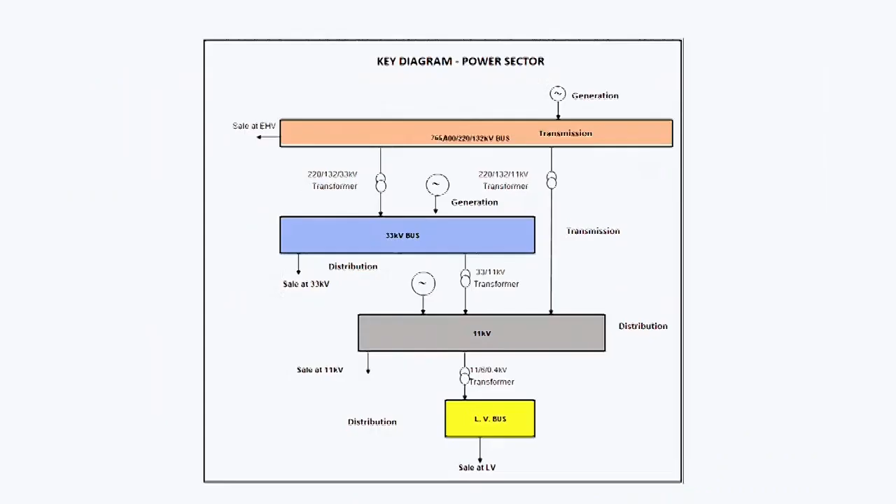Now we shall start discussing energy demand forecasting through applications of AI, artificial intelligence. So for the benefit of students, let us see how the power system is. On top there are generations, mostly large generating stations, then connected with extra high voltage transmission lines. Then it goes to the distribution system. In most cases, distribution companies or licensees receive power at lower voltage, 33 kV, 33,000 volts and below. However, in a few cases, they also receive power at extra high voltage, 132 kV or 220 kV, etc.

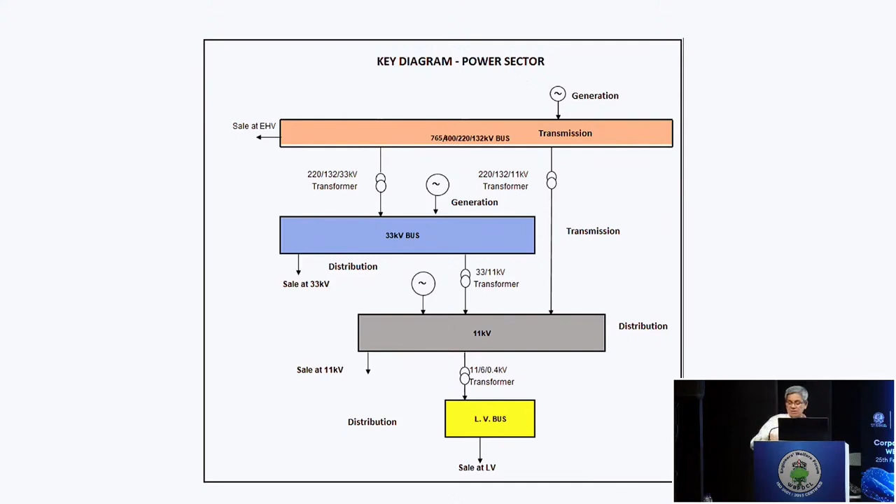Now this demand forecasting is essential for development of the transmission and distribution sector as well as generation. I already mentioned in the morning, it is more important to the generation system since of the average cost of supply to a consumer, 2/3 plus goes to generation. Now, the distribution sector is the most challenging sector because the generating company sells power to one or few distribution companies. Transmission receives power from a few generators and supplies to one or more distribution companies. But the challenge is on distribution because they supply to millions.

Now, some of the challenges, from the right side, are managing demand and generation. Electricity demand and generation has to be balanced. Now, because of climate change, more and more RE sources are coming. As of now, on a pan-India basis, the total renewable generation capacity is 100 gigawatt plus out of 400 gigawatt. Giga means 1000 megawatt. With more and more RE sources, challenges are more because on the demand side, we do not have any control. We means a distribution company, because it depends on consumers. The demand is balanced by controlling the generation.

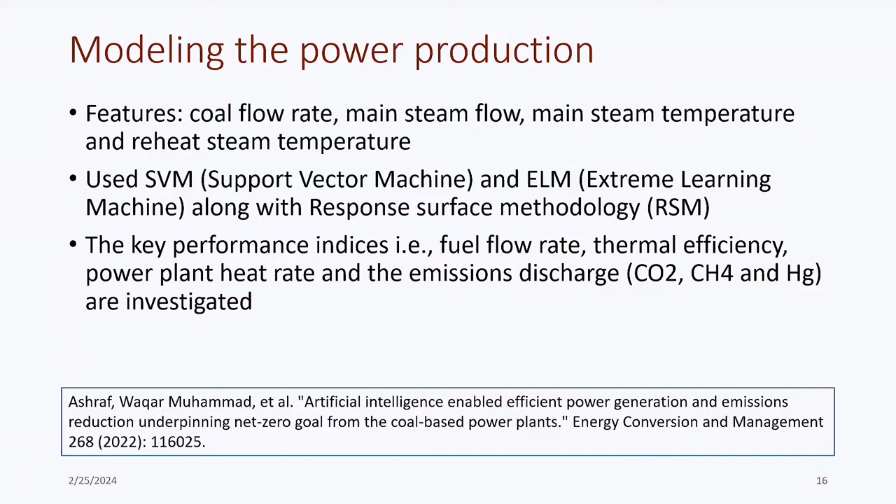So this is a demonstration. They had a particular task, which is efficient power generation with some net zero goal. And they also look at not only the production but also the reduction of these emissions, etc. And they're able to demonstrate that by using this machine learning model, they're able to get better efficiency.

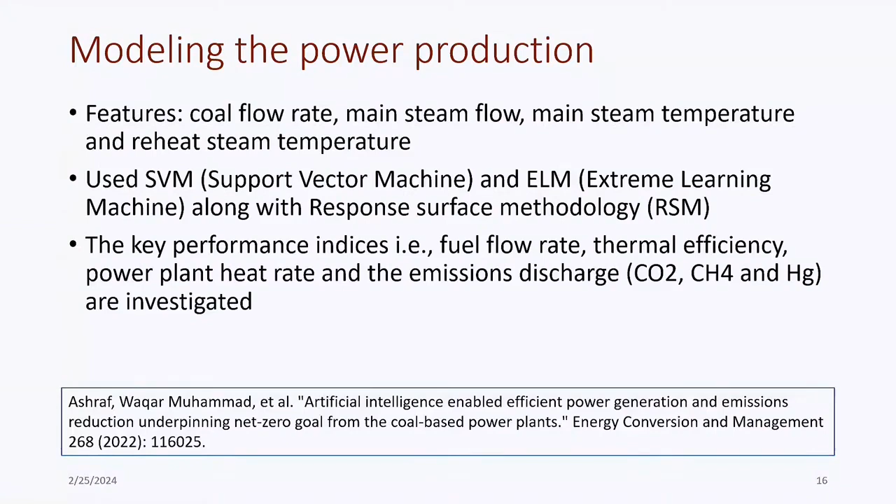There are other examples of supervised learning. For example, there are a lot of tasks in manufacturing plants, and I'm sure in power plants, where object recognition is used. So suppose, again, I do not know much about the plant, but there are different components. You want to understand whether a component is in the right state or not, or if there are different states of a particular object. So people often use computer vision as a classification task to detect the state of an object or detect the presence of objects. So these are all supervised classification tasks.

Then let's look at an example of unsupervised learning or clustering. So what is clustering? Clustering is one form of unsupervised learning.

It's a form where one takes data which is not labeled and tries to find patterns in the data and find the main groups in the data. So group similar objects. And you can think of one application of clustering for anomaly detection.

Suppose you have a lot of data of the normal operation of a plant. And then you apply clustering to find the different patterns. And you want to understand when there is some problem, right? And the main problem with understanding this is that the failure cases are very limited.

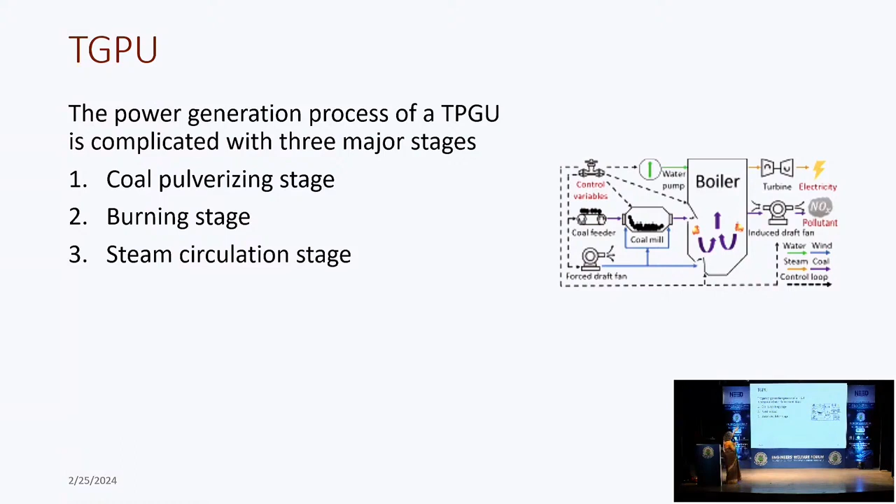So I have limited understanding of the different components of the power plant, but if you permit, I'll talk a little bit about the portion that I understood. So what they say is that the TPGU, because you people are experts, I'm not, but in this paper they say that their TPGU has these three major stages: the coal pulverizing stage, the burning stage, and the steam circulation stage.

And in order to build the model, both for the simulator and for building the controls, they have considered all these different stages and what are the different control parameters and the requirements of each stage. And they have identified what are the important constraints and what are the important controlling parameters. For example, for the coal pulverizing stage, they say that the amount of coal should meet the demand load. Then the valves of the cold and hot air blowers have to be adjusted to ensure suitable primary air temperature.

These are some constraints. For the burning stage, they say that the valves at each of the injection locations, the 20 to 48 locations, need to be controlled precisely. And then there are safety and regulatory issues that need to be guaranteed, so that the pollutant norms and negative internal pressure have to be maintained. For the steam circulation stage, they said that the steam generated needs to satisfy multiple temperature and pressure requirements, which are controlled by the valves, etc.

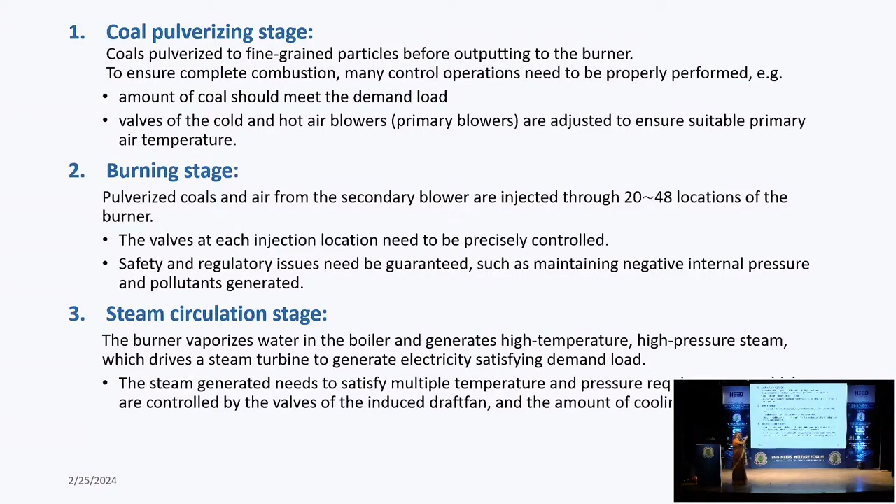So whatever it is, in a typical plant, there are a lot of different components, and they have their behavior and what needs to be done. This is only part of what is reported in the paper. There are several other things. So there are many such control parameters. So what they have said is that in their work, they look at about 70 to 100 major continuous control variables and the chemical properties of the coal, that is the input materials.

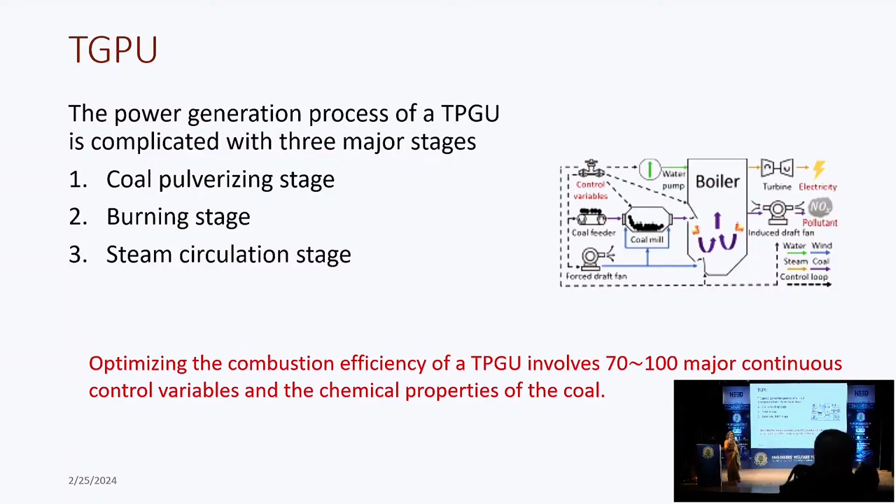Now, I'll take a digression. I'll talk about the very basics of reinforcement learning. In reinforcement learning, in the basic form, we assume that the underlying model of the system is a Markov decision process, where at a particular point there is a state. And when you take an action, the system changes state in a manner which is stochastic, but which is Markovian. That is, the next state is not necessarily fixed, not deterministic. It may be stochastic, but it only depends on the current state and the action.

And you receive a reward. For example, if there's more production, there's more reward. If there are more pollutants produced, then there is a penalty. So reward and penalty are there. Policy is how the system is behaving. When you're controlling the system, what are your control actions? So you are trying to understand, at each state, what is the action that you should take? That is the policy. That is what you want to learn.

And your objective is given by a value function. The value function combines the reward and penalty that you get into a function which you want to optimize. And the policy that you have to decide is the action at every state so that this value function is optimized. So for this, the underlying model is taken to be a Markov decision process, which has states, actions, rewards, transitions, and value function. And there are different ways to construct the value function. One of the most popular types of value function is the discounted sum.

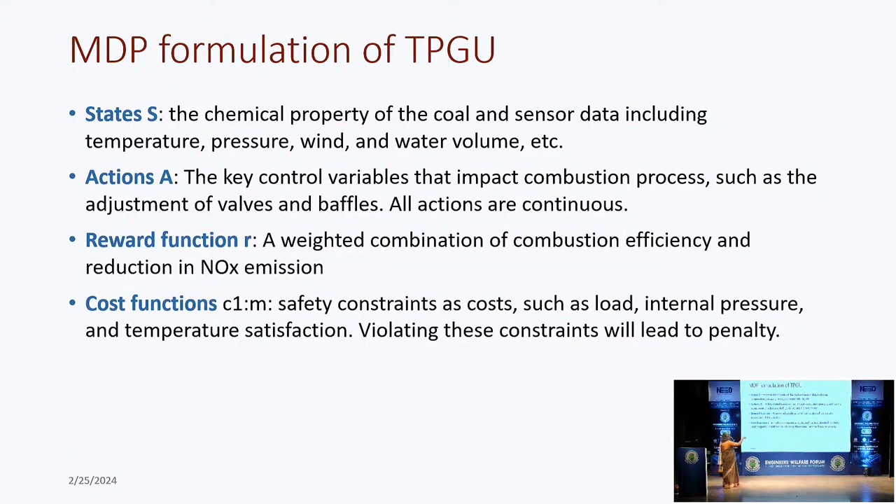Now, for the TPGU that we talked about, the state that they have taken is the chemical property of the coal and sensor data, including temperature, pressure, wind, water volume, etc. The actions are the key control variables that impact the combustion process. They have taken 70 to 100 different control variables. The reward function is a weighted combination of combustion efficiency and reduction in NOx emission. And the cost function has safety constraints, which are the regulatory norms.

Now, based on this, in order to augment the data, they have built a simulator. Even to build this simulator, they have used a data-driven machine learning approach. I'm not going into the details, but they use an approximated dynamic model to generate future states. They do not build one monolithic simulator. Rather, for these three different stages, they have used different machine learning models, using an RNN, LSTM, fully connected network, different types of neural network.

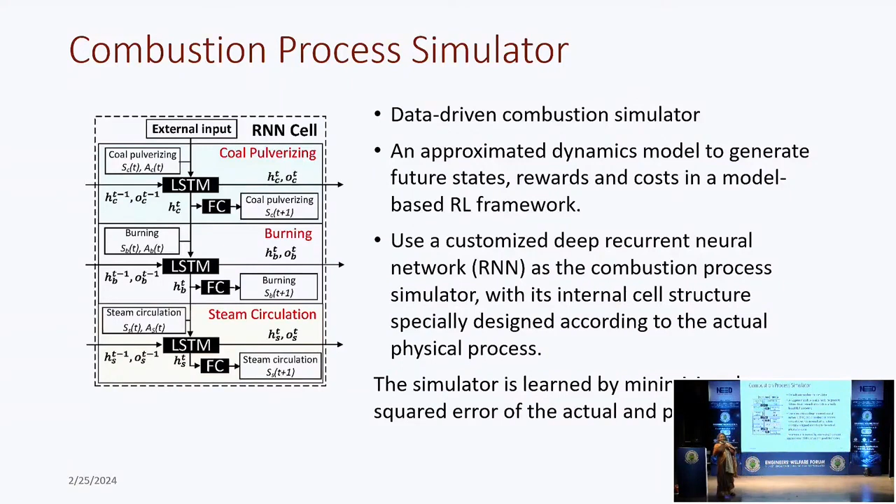They have built the simulator, which is faithful to the data that they already have. But as I said, it is not guaranteed to work well on out of distribution data. That's why this is called an imperfect simulator. And to build a reinforcement learning system, they have a cost critic, because they have to abide by different regulatory norms. So the cost critic enforces the safety constraints.

They also take into account the risk of the simulator, because when the simulator works on out of distribution data, you cannot trust it fully. So they also model the risk. Based on that, they have built a reinforcement learning model which can decide the control actions of all the 70 to 100 control variables. They demonstrate in this paper that they have used this control on 4 different large thermal power plants in China, and in most cases they have got a good amount of improvement.

So this shows that in the power plant, the use of machine learning has been demonstrated; people have used it and found a lot of benefits, and there is a lot of potential for further systems.

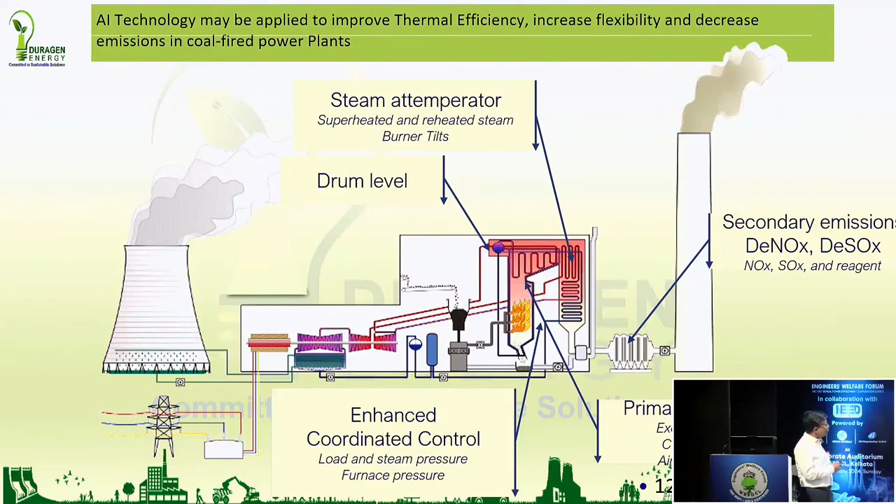Now there is an advanced stage, adaptive AI control. This adaptive AI control will sit on top of any control model, and whatever set point is set from that model, it will be continuously superimposed on that set point. The self-tuning AI platform will increase the ramp rate, startup time, reliability. The thermal stress, that is more important, will be addressed by all these things. And this model can be on premises or on cloud.

So that is one thing I'll come to, whatever disadvantage or doubt is in our mind. At India level, in our power sector in India, we are still not able to avail all the facilities, but on a very piecemeal basis, some of the applications are already there.

So in Indian industries, real-time safety violation detection is there, already running day and night, 24/7. Then automated anomaly detection of assets through drones, mainly at heights. Then ESP monitoring, any defect in ESPs, all these things are monitored through that. Then AI ML based advanced pattern recognition for predictive maintenance.

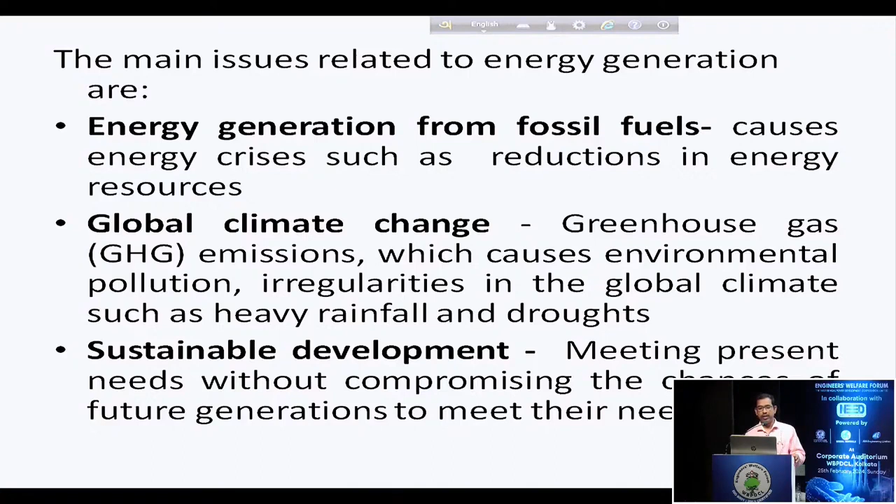So okay, so now you are experts in energy and also power. So you all know that energy generation mostly comes from fossil fuels, and you also know the impact of that kind of power generation on the environment, and you're familiar with the greenhouse gas effect and environmental pollution and how it is affecting the global climate. So now we have to look for sustainable development, meeting the present needs without compromising the chances of future generations to meet their needs.

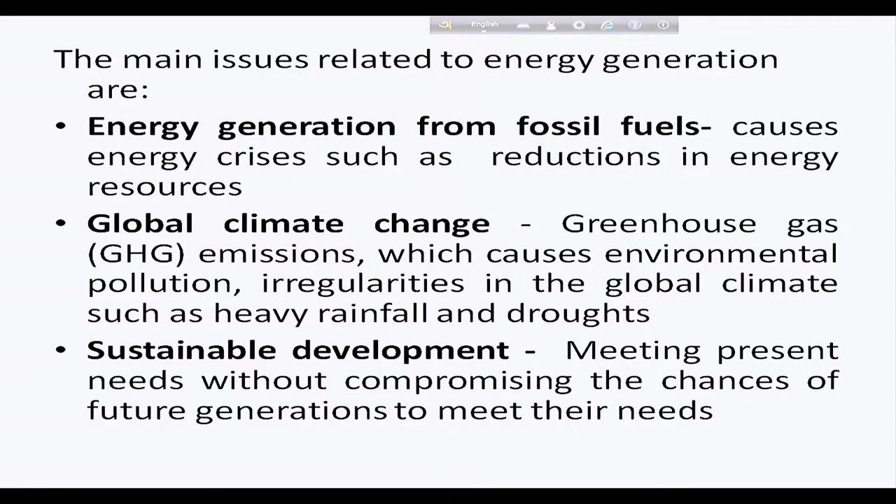So one of the drawbacks of the existing energy generation system that is dependent on fossil fuels is already known to you. So we need to explore renewable energy sources, which are actually the alternative supplies for future energy management. So why should we focus on that? Because it is clean and green, and it is also beneficial for the protection of the environment.

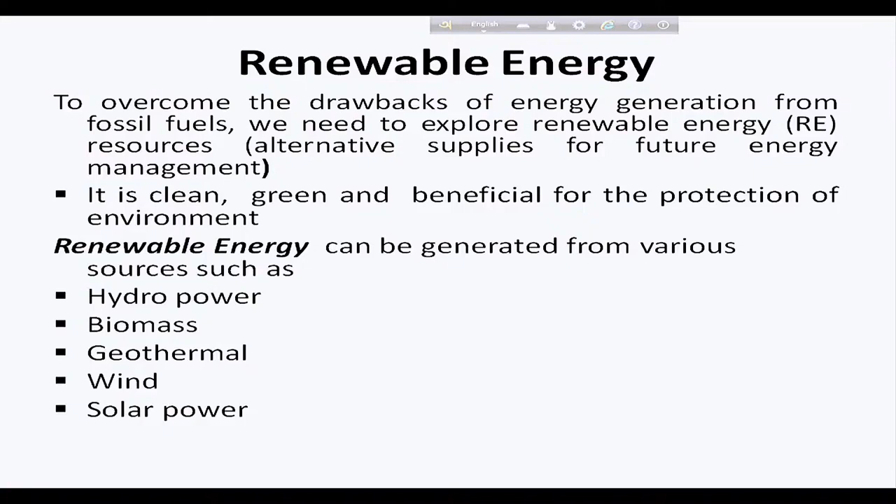So all of you know that there are different sources of renewable energy: hydropower, biomass, geothermal, wind and solar power. So one of the important problems in renewable energy forecasting is uncertainty. The uncertainty comes from the high fluctuation and unpredictability of renewable energy sources, say solar energy or wind energy. You know, the uncertainty in wind, uncertainty in sunlight. Due to this fact, there is some uncertainty in renewable energy sources.

So now, how our system can be customized, how our system should be integrated with renewable power. So the point is that due to this integration, if the forecasting can be done accurately, particularly short-term forecasting in a short time, then the power grid operator can operate the grid in a proper way, and that can minimize the production cost also. I have limited knowledge in the power domain, so how it can actually be integrated in reality, that is the topic of research.

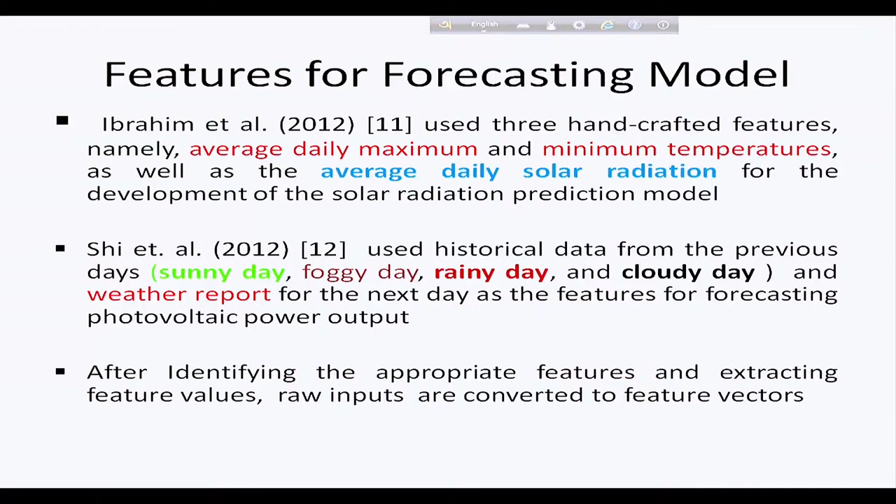So after identifying the appropriate features and extracting the feature values, the raw input should be converted to feature vectors. A feature vector is nothing but a vector of the values of the features. So we have to collect the vector of the values of the features. This is a summary of some of the work that I have identified and the features that have been used. I have already mentioned Ibrahim et al., who used this type of features.

Another work, on wind power prediction, was done in 2021. They used the average wind speed and average ambient temperature as features. Now this is a very interesting one. They compared many machine learning algorithms: linear regression, logistic regression, lasso regression, elastic net regression models. The 21 different features they extracted from different weather conditions: humidity, temperature, precipitation, snowfall amount, cloud coverage, wind speed, wind direction, wind gust, angle of incidence, and other features.

Since they collected 21 features, they applied PCA. PCA is principal component analysis, a technique by which the 21 features can be reduced to a certain set of the most significant features. All those features may not be important; some may be more significant. So how to identify which features are more significant? PCA can help us identify the more significant features from the given set. Finally, it produces some uncorrelated features, obviously fewer than the dimension of 21. So in this work, they applied this kind of features.

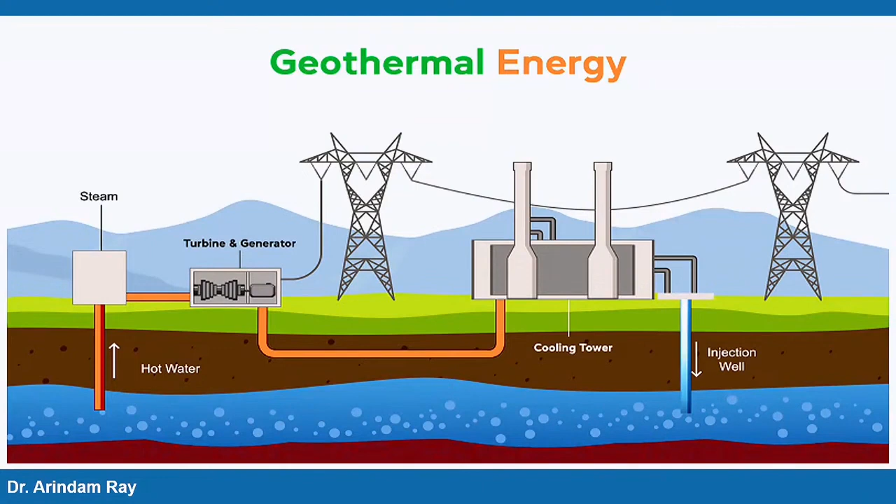Now we can go forward with geothermal energy. I'll be showing you where geothermal energy works. In geothermal energy, we can retrieve the internal thermal energy, and the hot water and steam can be passed for generating power. It is already there, not a hypothetical image. Our Indian government has already initiated this in Ladakh, in the Puga Valley. They have already started this, and very shortly it will generate power.

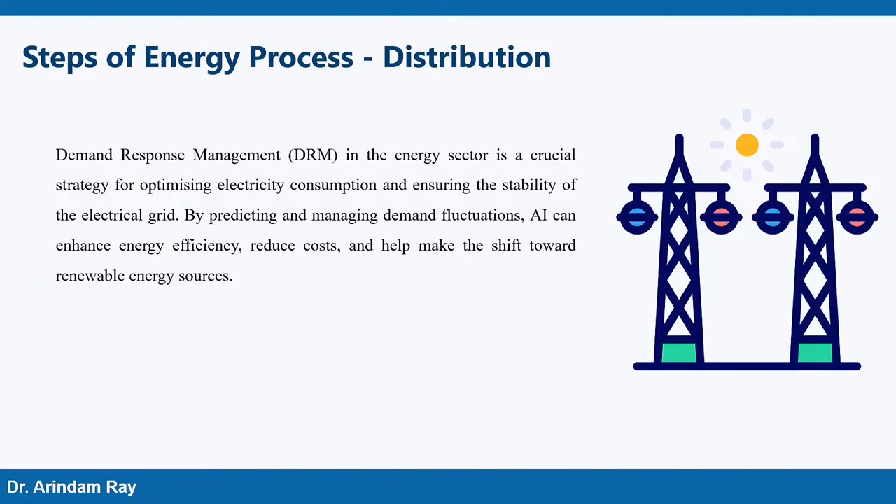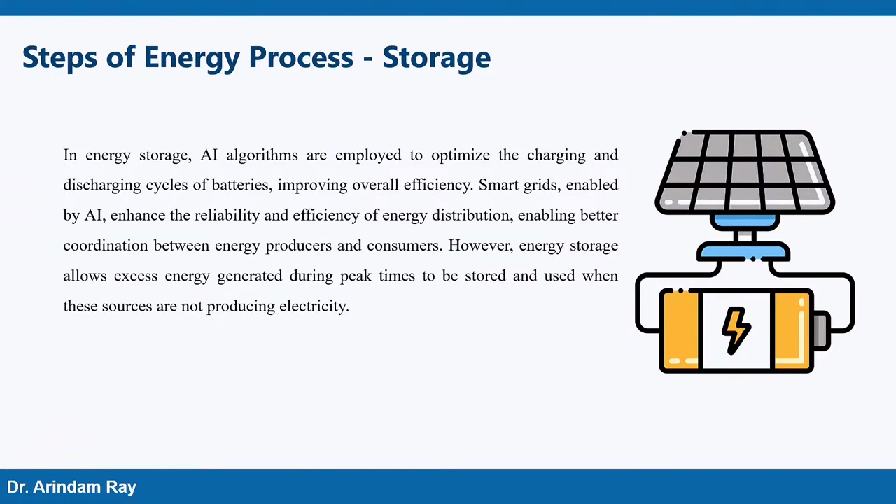Now after that, storage. When we are generating power, we cannot store it, but in the case of renewable energy, to some extent we can store it in our systems. A big amount we cannot store, but to some extent we can store it for times of high requirement. So that is also an important part.

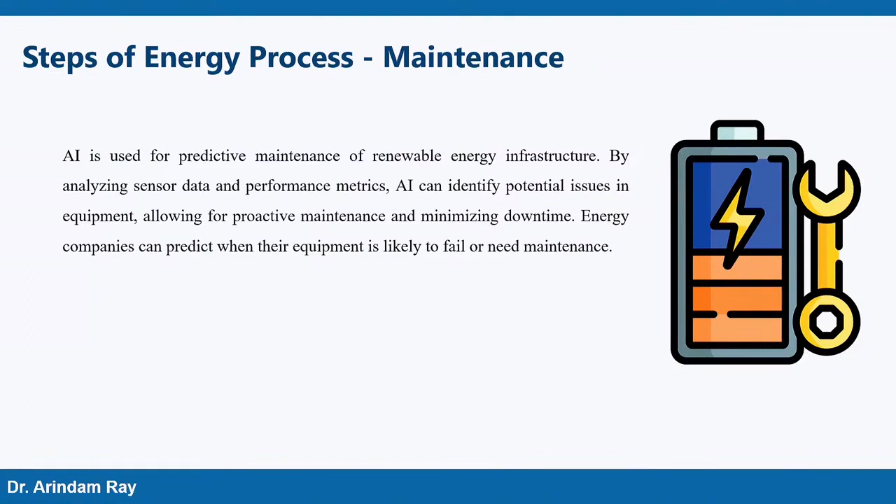Another is maintenance. We should maintain the proper scenarios, proper authorities and proper formulations on a regular basis, so that we can get the information and maintain the quality of the output properly.

So finally we can conclude that artificial intelligence is very important and required in every section, in the case of power divisions or power sections as well. We are also using a number of things, but it should be maintained in each and every section in a proper way, in a proper fashion, so that we can use this. And for that one we can conclude that there is also technical involvement, or growth of the economy.

Also we can generate jobs, because it's not like an ordinary job, but we need technicians or skilled people, because in each and every sector we need skilled people. Until and unless we have a skill, we are not having a job, because everywhere the common people need a skill, because in the entire scenario we require skill for that one.